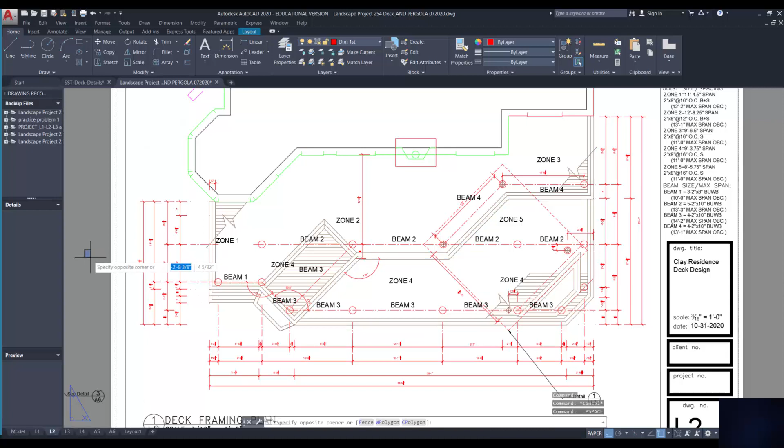So for instance, from the building here to the edge of that beam has a pretty definitive dimension. That dimension, I think it's 11 foot and change. I can barely read it here on the corner. Actually, I'm going to come off of this here, so that I can zoom out or zoom in. 11 foot 4 1/2. So this zone here has a very specific dimension to it that changes as soon as this beam gets introduced.

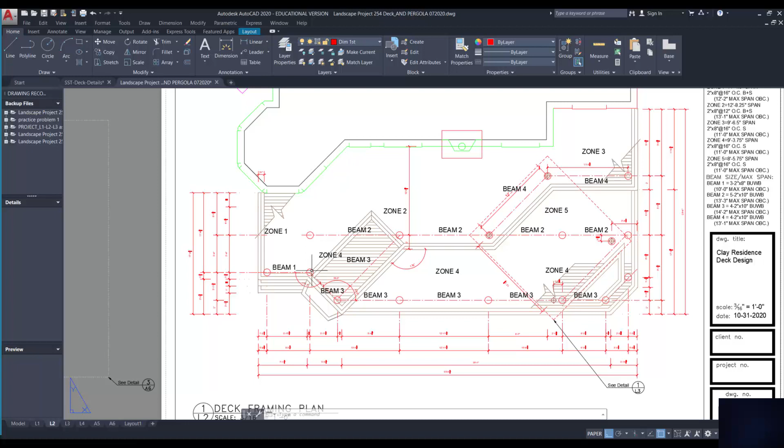Now, why did I put the column where I did? Well, this is an angular line, so the actual distance changes all the way along the line. It was just as easy for me to line up columns, because now I'm thinking, how is the contractor going to build this? He'd love to have things in alignment, because then he can map out a grid on the site, dig the holes, he's done. So I brought the beam down to this level.

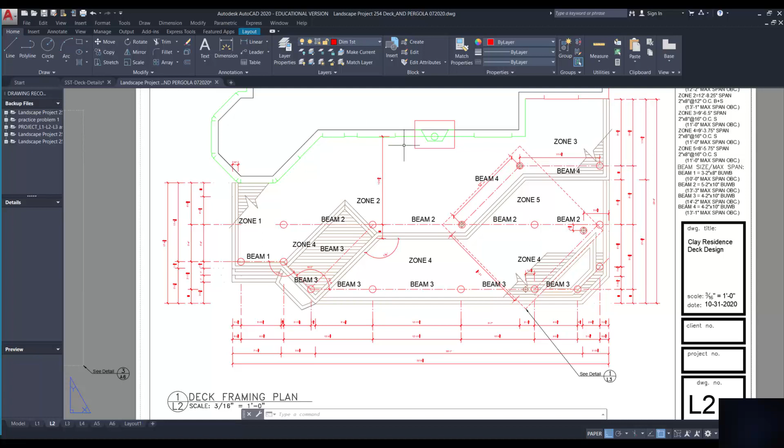So you'll notice in this area here, from the wall to the beam, it's the same dimension. So since it's all the same dimension, yes, I know it narrows here, this will be zone number 2. And then I will do the calculation for this zone area, the distance from the wall to the beam. So what about here? Well, I've got a consistent distance from the wall to the beam along here. So this is zone number 3.

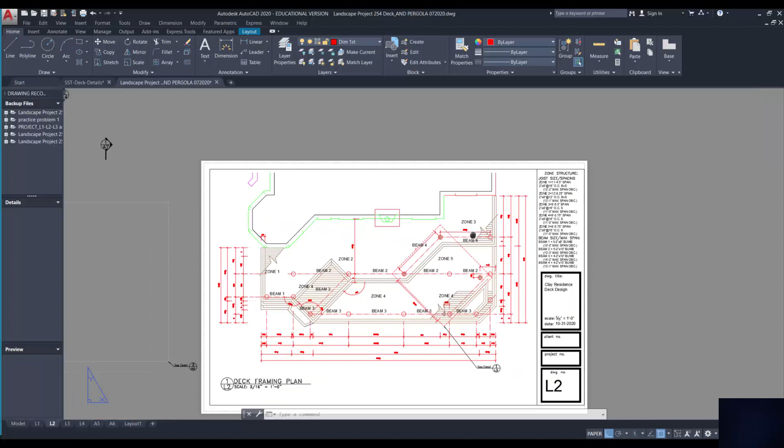The concept of zones may be a bit challenging, but basically you're looking for uniformity. So for instance, look at zone 4. It extends over the greatest area. I've got diagonal beams running through it and everything else, but realistically speaking, the distance from beam 2 to beam 3 is consistent all the way along this area. That's another reason we lay it out the way we do, so that we have to do fewer calculations. So zone 4 basically runs this entire width. The whole lower level is zone 4.

Now you'll notice here, I've called this zone 4. Why? Well, realistically speaking, if I satisfy this condition here, which is the worst case scenario in terms of the distance between beams, which is 9 foot 3 3/4 inch, I will satisfy anything that gets smaller than that. So I don't want a separate calculation for that. I mean, I could. I'm going to save a couple of bucks on some wood. Forget it.

What I'm going to do instead is say all of this is the same zone. So all I have to do is one calculation across here, and those joists will be consistent all the way through that part of the project. Now you may say to yourself, well, you got a different beam here. You got a different structure here.

Yes and no. I do, to support an opening. But that's the only reason I have it, is to support that opening. In fact, this beam here just does that, supports an opening. It doesn't do anything else. And it carries so little weight that I could have a minimum size beam here allowed by code, and it'll do the job. So remember, the joists hang over this distance, and then it needs separate supports for openings.

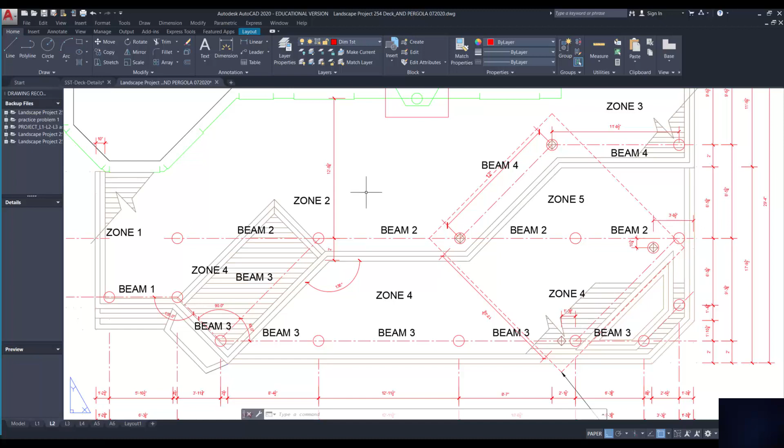Okay, let me just zoom back a bit here. And now I'm going to show the concept of framing. So let me go in here. I'm going to turn off the actual visual deck elements, so the pattern of the finished floor, and I'm going to turn on the structure that supports it. Let me just do the first level first, and hopefully this will simplify it. So this is the upper level of the deck.

And imagine, if you will, each one of these beams is at the same height all the way through it. And now hopefully you can see the zones a bit clearer. You'll notice this beam, beam number 2, has the same distance all the way through here. Great. Beam number 3 has this very short configuration. Beam number 1 has this very short configuration. Beam number 4 has this short configuration over here.

So I've got 4 different size beams based on their spacing, post to post, as well as their distance between that. When I go to calculate the beam, I look at the worst case scenario. Notice this beam here has some really short elements to it. I don't care. I'll ignore that. So what I do is I look at the very longest element, and that will help me calculate the joist that I need and the beam.

So the column-to-column spacing for that beam is 11 foot 8.5. The joist length is the dimension I have here, 9 foot 6.5. Sorry, I should have said the joist span. The joist length is actually 2 feet longer. Remember that. We always overhang by 2 feet because it's a very efficient design. So the joist span is 9 foot 6.5. Now you can see the importance of proper dimensions.

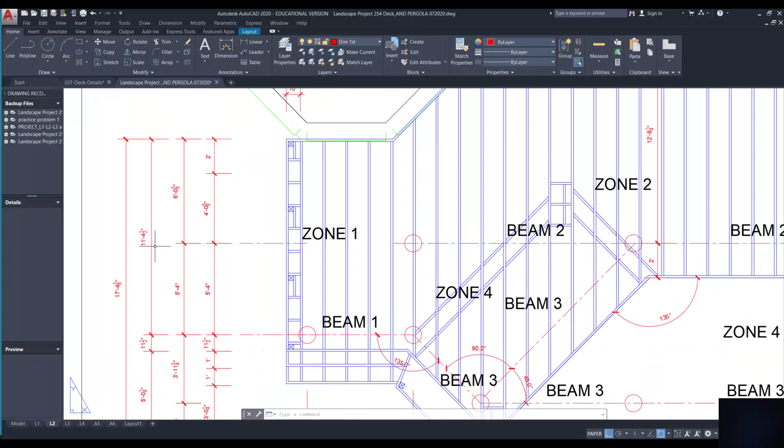So there's my zone 3 joist span, 9, 6.5. I don't want to lead you wrong. The joist span for beam 2, for zone 2, is 12, 8.25. And for zone 1, beam 1, the joist span I have here is 11 foot 4.5 inches. Those are the numbers I'm going to use for my calculations.

Why am I not doing it down here? Because if it satisfies what's above it, it will definitely satisfy those elements that are below. Now, zone 4 is actually part of the lower section, so that's why I'm ignoring it in here. Let's take a look at the next level.

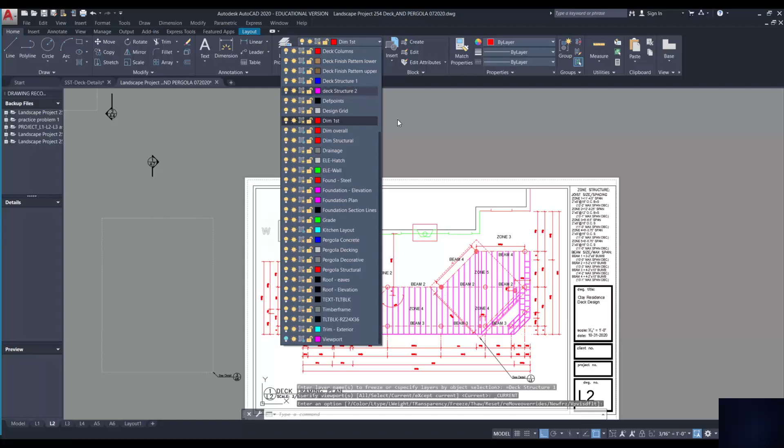So I'm going to double click inside my viewport, and I'm going to turn on this time the second deck structure, and I'm going to turn off the first deck structure just so it doesn't interfere, and then we'll have them both on. Oh, it's saying that that's current. Okay, that's fine. So there is my second deck structure, and these are my different zones.

So notice I drew the joists coming right up against the beam. Why? The other ones I drew overhang with a 2 foot overhang. These are the joists that are going to overhang the first layer of beams, but tie into the side of the second layer or height of beams. So I've drawn this to show you that these will all require joist hangers that tie into the side of the beam, whereas this is simply overhanging 2 feet over the edge of the beam. That's why we've drawn it the way we have.

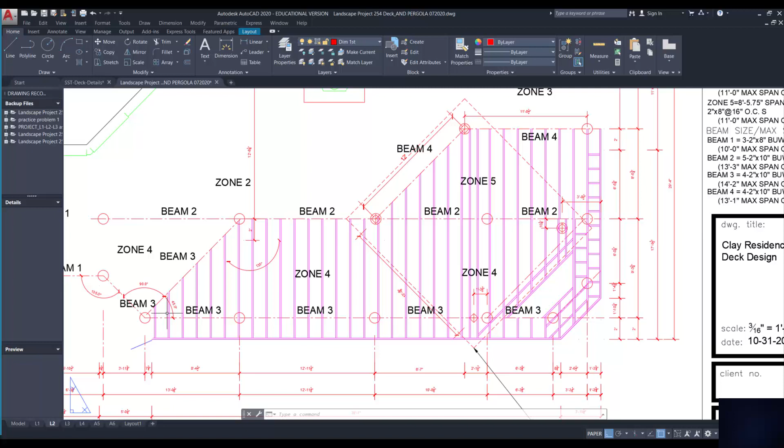The actual spacing isn't important because other than 16 inches on center, where you start doesn't matter because whoever the builder is, they're going to start wherever they want. But it's to show that sort of particular element to it.

Now I've got some other additional framing because I've got a post of the pergola that sits on top of it, and I want to provide extra joists on either side of it. So here's a beam. You can see it right here. Because it's a beam here and this joist goes right over top of it, I can have 2 short joists going on either side of that post and then another joist on the other side, and they don't have to line up. But at this point, it's not important you understand that as much as you understand how you kind of frame out this entire structure.

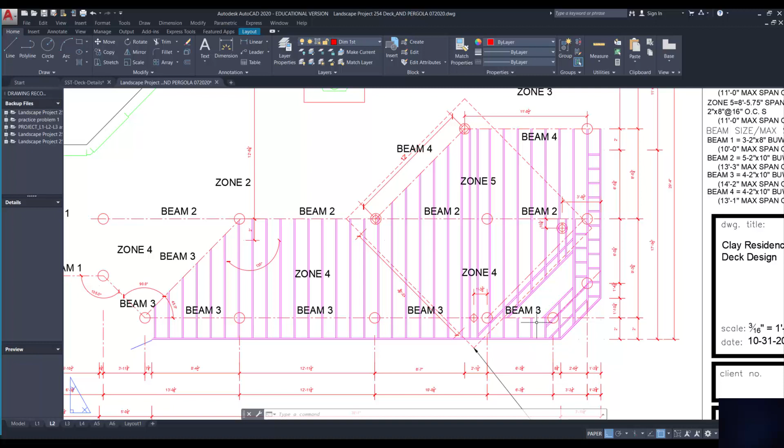Now you notice here I have joists showing from one side to the other. There's one thing I need to show, and that is right here. It's another ledger that ties off the ends of these joists to sit on top of the beam to provide this opening, this support opening here. So let's take a look at zones. I think this becomes a bit clearer with my separation of layers.

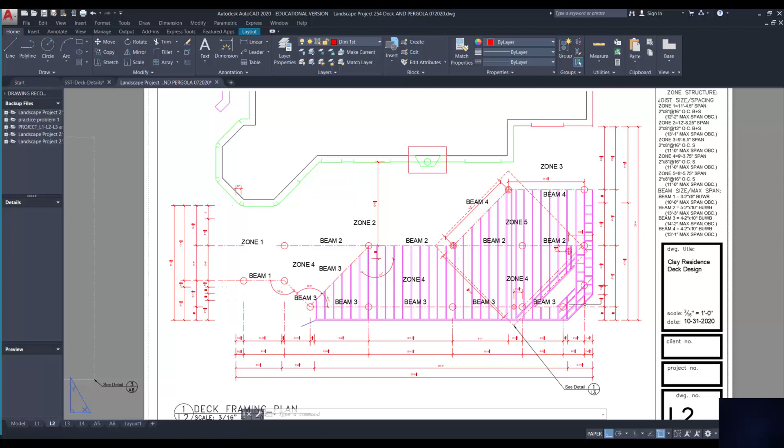Zone 4 is the same distance between beam and beam along this entire length. Notice how beam 2 runs the entire length on one side, beam 3 runs the entire length on the other side. So when I calculate beams, I take the worst case scenario beam. And in this particular case, I've got beam 2, beam 2, beam 2, beam 2. These are all the dimensions down here. And because this beam has less supportive length than this one here, that's why I'm picking this 12 foot 1 1/8 as my worst case scenario. I satisfy this, I satisfy all the rest. I know that's a lot to take in, but it's conceptualizing how we approach this.

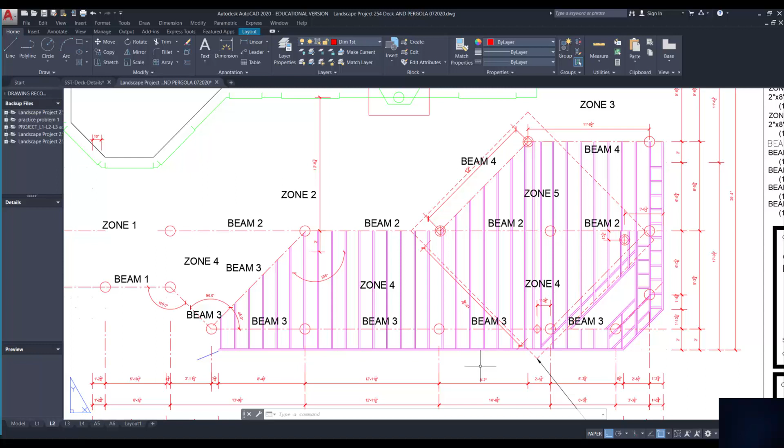Let me just turn back the other layer. Your goal is to be able to zone your entire project out, just the way I have, and you can do that in a sketch design, and submit it to me. Send it to me. It's not for marks. It's for me to quickly review and say, yeah, you could do this, or I will mark it all up and put different columns everywhere and different beams everywhere and say, you know what, you didn't quite get it, but that's okay. We're going to calculate it based on this and help with your zone requirements.

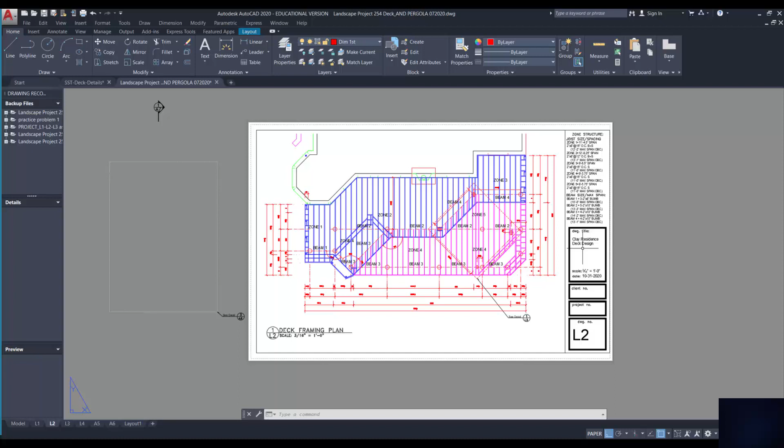Once you know your zone and the maximum spans of your beams, that's when you can take this whole project and then do what? Do the calculations that we discussed the other day. And I've got on the right side all the different zones and all the different calculations I had done for this particular project. So this file I'm going to make available to you. So if you're completely lost, go back to this. Take a look at it. Figure out how I calculated the zone, where I got the numbers for the spans, where I got the numbers for the beam center to center, where I got all the information, and then refer back to the charts.